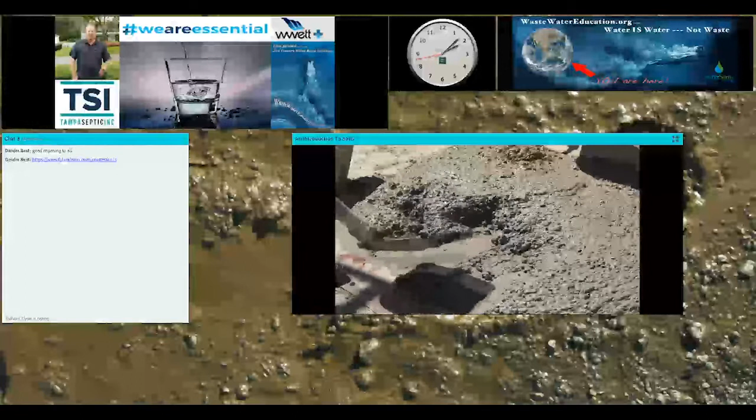Soils are amazing. They're complex and full of life, and yet few of us give soils a second thought. In this course, I'm going to take you on a journey through the world beneath our feet. We'll start with the basics of soil science, what soil is made of and how soils are formed. We'll also look at the variety of soils around the world, why soil is so important, and the life within soils. Finally, we'll look at threats to soil and why we need to protect it. Throughout the course, you'll learn about cutting-edge research in soil science taking place here at Lancaster University.

If you already have an interest in the environment, this course will be perfect for you. You don't need any specialist expertise or knowledge, and it's open to students from anywhere in the world. You'll get the chance to participate actively by joining discussions, taking part in quizzes, and getting your hands dirty with activities related to the soil where you live. By the end of this course, you'll have a basic understanding of soil science and some of the threats to soils. Join us and learn that soil is more interesting than you might think.

We thought this was a really appropriate inaugural class for the WWETT series because this is Earth Month. Environmentalism starts with protecting the very stuff that makes life possible on this planet - our water resources, our clean air, but also the soil, because without that, we won't be able to grow enough food. I think sometimes we hear a lot of misconceptions about wastewater systems, and about on-site wastewater systems in particular.

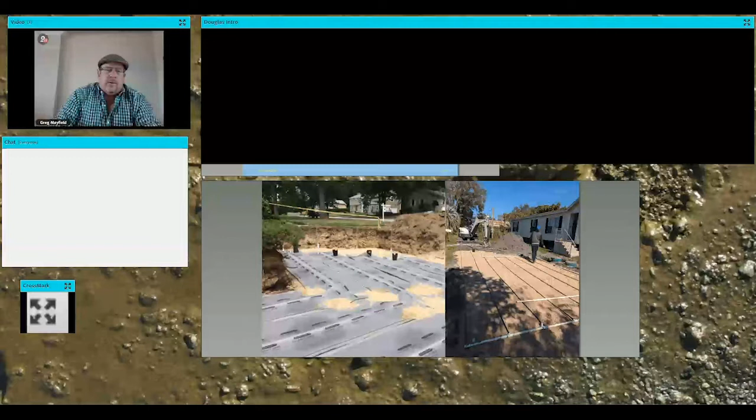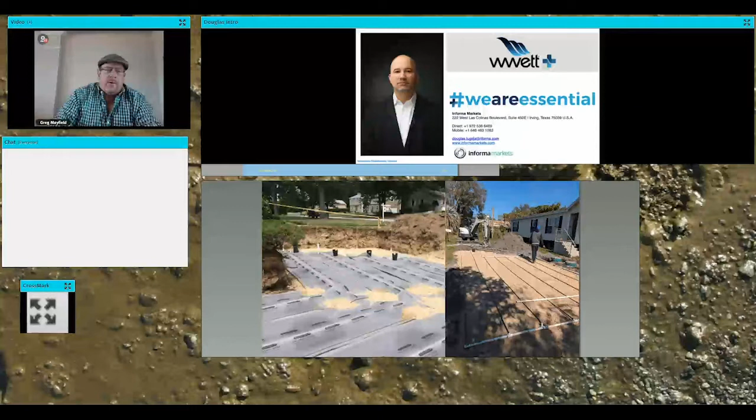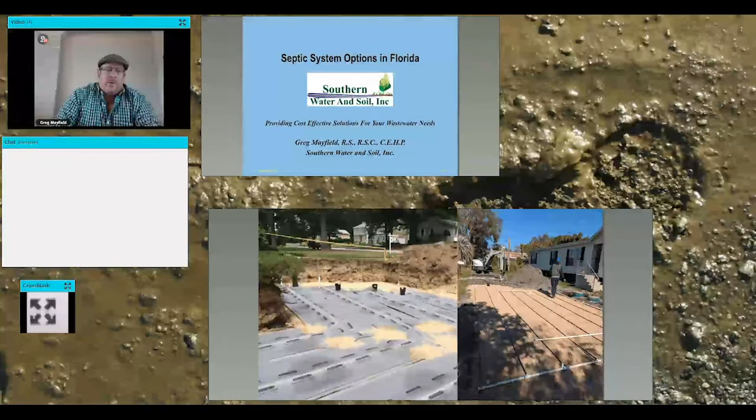One of the things we're going to ask you to consider at the end of this session - if you've attended the WWETT Show, you'll know it's just as much a social gathering as it is for training, for looking at things on the exhibit floor, and for getting together with your colleagues.

The entire city of Indianapolis is closed down. The convention center has not been in business since March 17th, and this has obviously created an incredible economic burden for all the service industry folks who help make the Indy WWETT Show a really enjoyable event. There's a virtual tip jar that's been created where you can contribute if you've been to a particular restaurant.

My background is I worked for the health department for the state of Florida in the 90s, from 97 till about 2001. Then I worked for the Southwest Florida Water Management District as a hydrologist in their program till about 2004 as a project manager. Meanwhile, I was doing soils and engineering for different types of systems with other contractors, about 15 or 16 different contractors here in Central Florida. Over that time, I've learned about different systems and tried to provide solutions for different things that were out there for us.

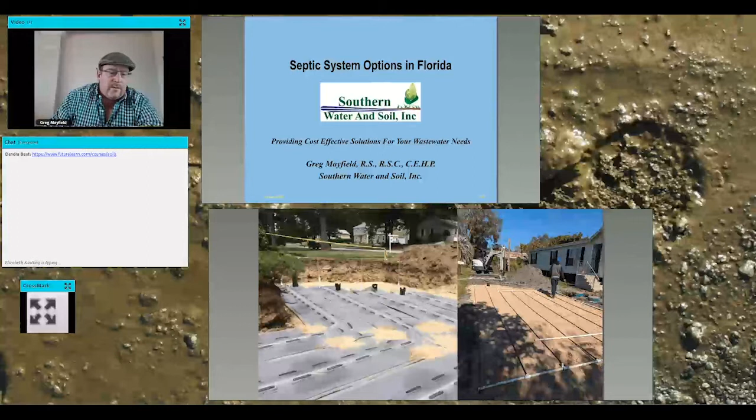The first one I'll talk about - we'll go over some of the pictures that I have.

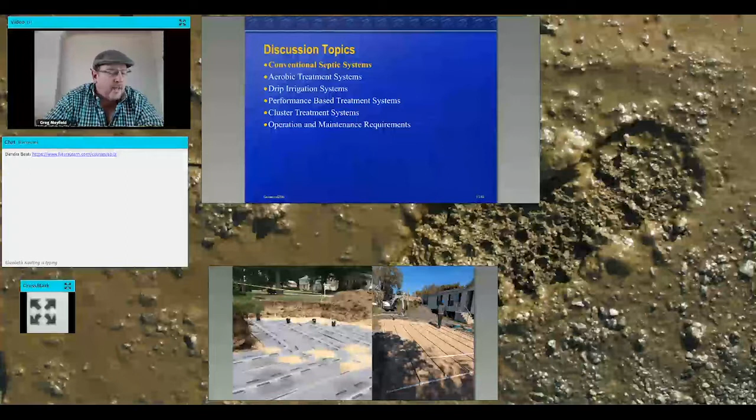Some of the things we're going to talk about are products made by conventional type septic systems that lower the mound compared to a conventional rock and pipe system. The conventional rock and pipe is typically 12 inches thick, 3 feet wide here in Florida, and some of the chambers we have are 20 or 24 inches wide but only 8 inches tall, which trims things up and makes them smaller.

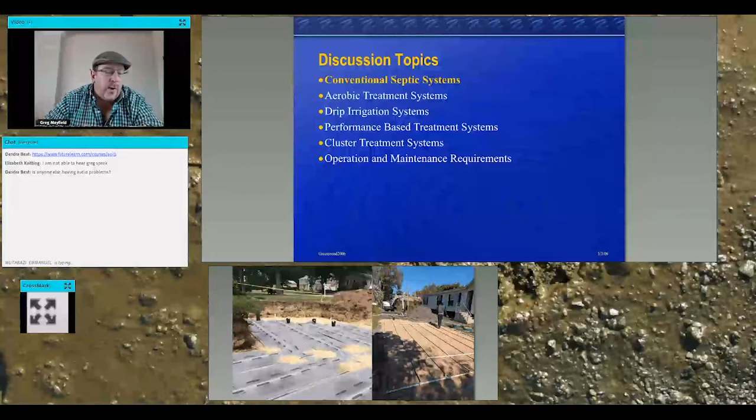Then we're going to go into some aerobic systems, and those aerobic systems allow us to go to a drip irrigation system. So I'm going to talk about drip systems, and then we've got some performance-based treatment systems, which are innovative systems that allow us to treat water to go into alternative type systems. We're going to particularly talk about the GeoMat system, how it fits into the Florida regs, and how it works. So let's go ahead and get started.

But this is still considered a conventional septic system here in Florida. It's probably installed quite a bit more than a rock and pipe system nowadays.

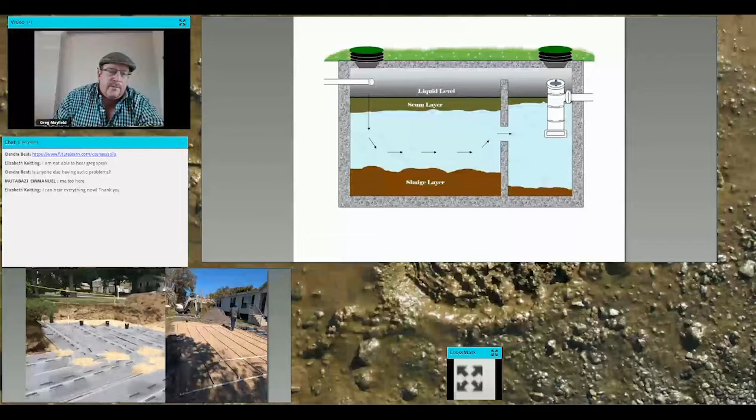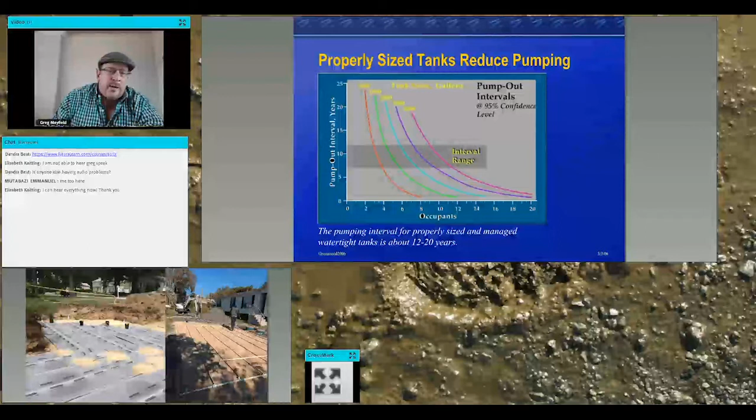A lot of guys ask me when we should have our tanks pumped. This is from Terry Bounds out of Orenco, who shows a pumping interval compared to the number of occupants you have - the more people, the more frequently you need to pump out your tank. So when people ask me when they should pump their tank, I always ask how big is your tank and how many people do you have in it, and that tells you basically when you should. Of course, the rule of thumb in this state is anywhere between 3 to 5 years, and that typically works out for your typical 900 to 1,000 gallon tank.

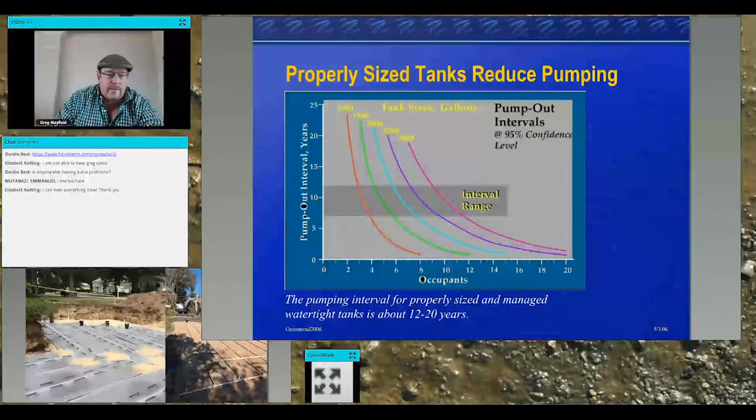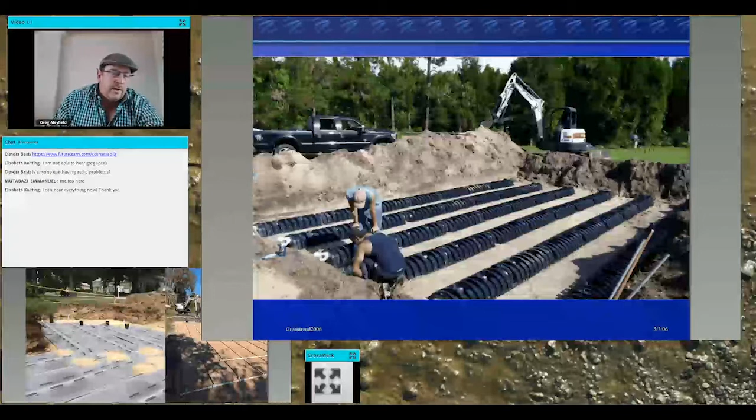This is another install where it would have been probably a 6 or 8 inch mound, and now we're going back in just a little bit below grade there with our infiltrator product. We have a system called PTI, only 20 inches wide. It's a bundle of pipe, 5 on the bottom, 4 on the top on this one, and it actually makes the size of the system smaller. If there was a rock and pipe system, the system would have been as big as that trench is dug out, but we showed how we can reduce the size of the system with this system.

Now we're going to talk about aerobic treatment units, and there's several different types of them out there. This one's what we call a Norweco unit, this is a Norweco Singulair Green. It's what we have to have in order to do drip irrigation, is aerobic treatment. We're going to show some pictures of the biomicrobics unit, and we typically will install one of these two systems here in this state.

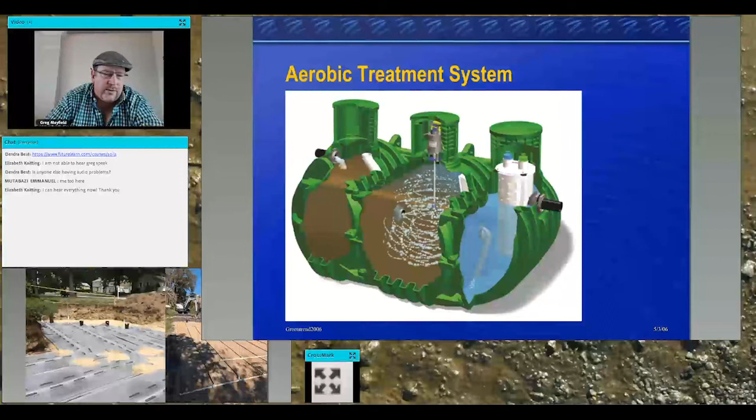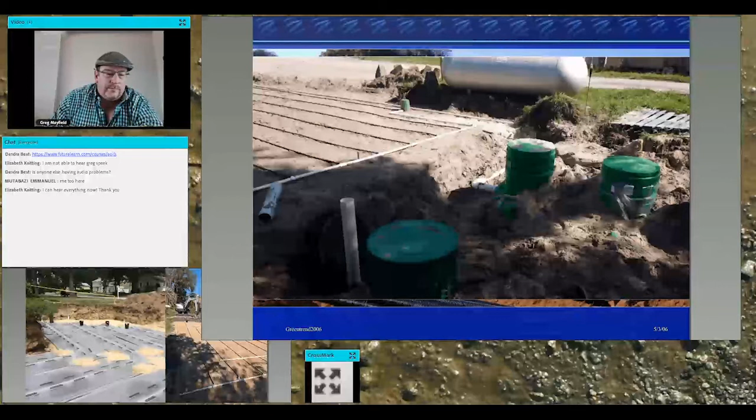Talk about aerobic units also. This one is the extended aeration system. I believe this one is a biomicrobics, or it's a Cajun Air, one of those systems out here. But what that one is doing is treating it, and then we're going into the drip irrigation into the landscape. You can see that we're following the landscape beds with the tanks, and then we put the drip out in the grass, out to the edge.

So here are aerobic treatment units. We have what we call our standard system, then we have a secondary treatment where you get somewhat we call the ATU treatment. And then we have what we call performance-based treatment systems, where we treat to a better standard. A lot of times you'll do that to get more house on a lot, or you have constraints to a water body and those kind of things. It actually reduces the regulation from distance to the water tables, and also to the water bodies.

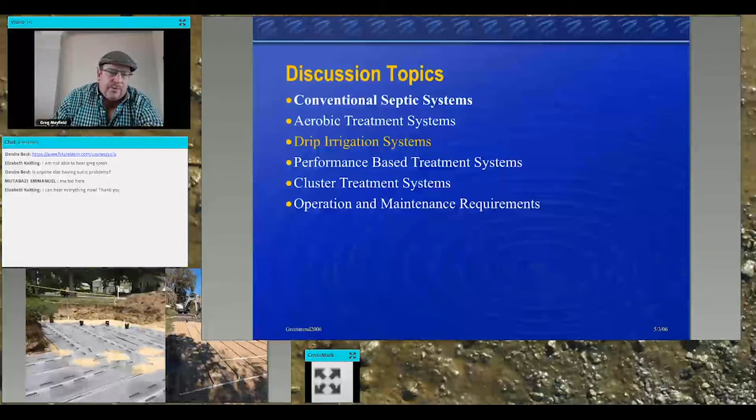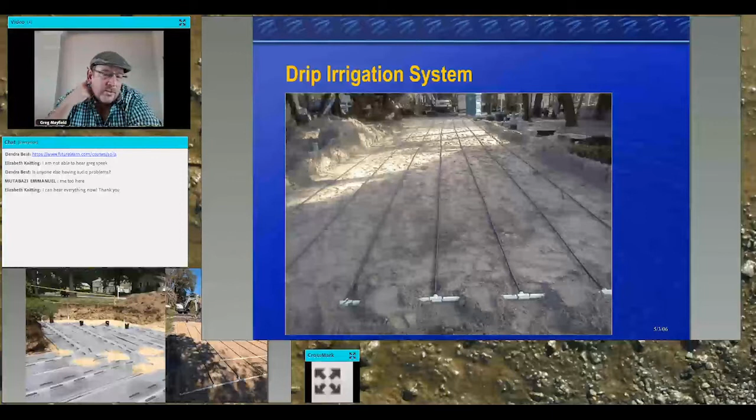Something to say, the EPA has said that decentralized sewers and wastewater systems are adequate, and if they're managed correctly, they're cost effective and a long-term solution for our needs. So some people say, well, septic systems are just not a permanent solution, they're just waiting for sewer to get there. The EPA says no, it's actually a viable solution, and I wish more states would get on board with that and allow the septic systems to do their job, and allow some of these innovative technologies to get in place and allow them to work.

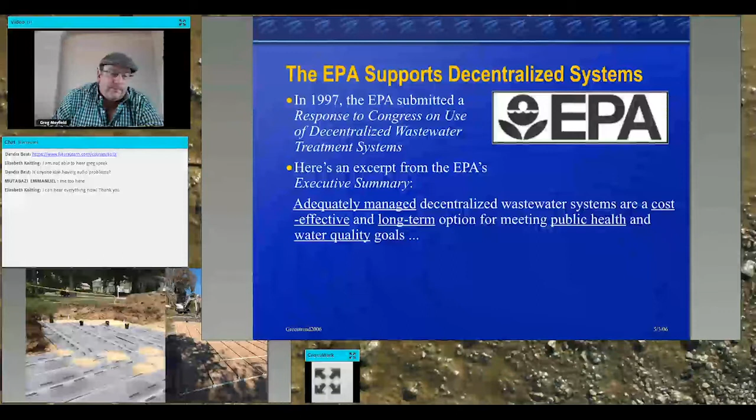This was actually at an Audubon facility where we did a treatment system that went out into a protected water body, an outstanding water body, near a cottage. They wanted extra treatment, so we did a treatment system here and went out into the drip tube. It was along a river, so it was fairly wet. Instead of having a 30-inch mound, we had about an 18-inch mound, which really reduces the footprint by about 50 to 60% when you account for shoulders and slopes. We shrunk the footprint down by about 50% on this one.

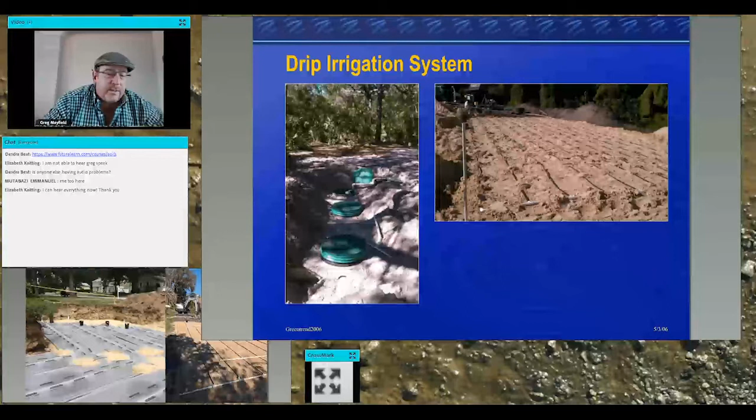When we're going out to the septic systems, they require pumps. Here's a pump set up where we're doing treatment through the system, and then we have a duplex system that's pumping out to the drip tube. I don't remember which project this is, but this is a typical pumping system where we're pumping out to the drip tube.

This one's at a Circle K, which is a fast, convenience store type use. They had replaced their system 3 or 4 times. We went in with several Norwecos on this one and cleaned the water up, then went into a drip irrigation system.

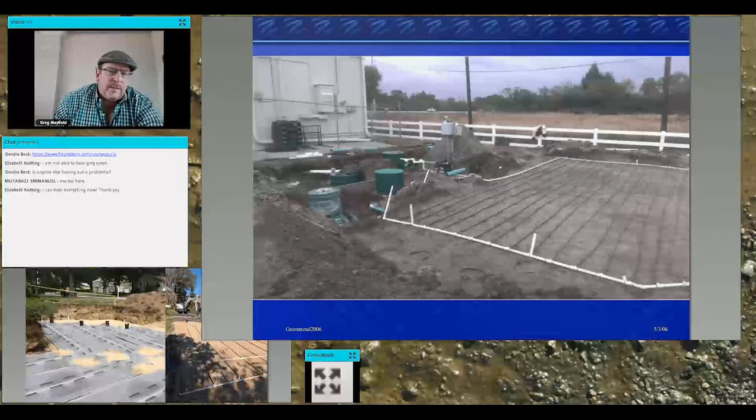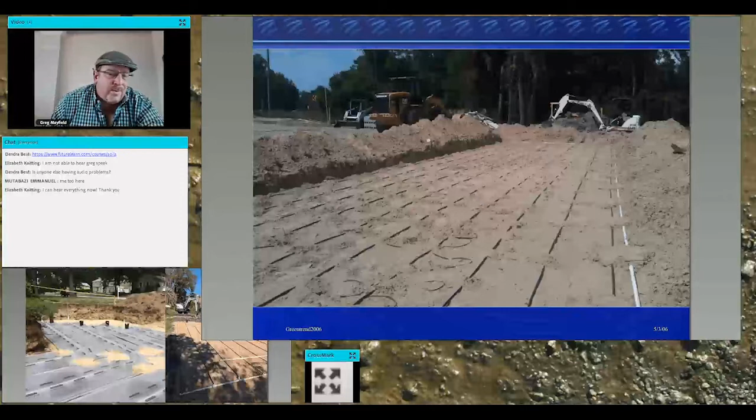This project was a daycare that we did, and we needed setbacks to a water body that was there. They needed 75 feet with a conventional system. We got it knocked down to 50 feet. We had to meet what we call advanced secondary treatment standards, and we used a Biomicrobics unit on this one, and it's doing great. I still maintain this one. It's probably 10 or 12 years old now, maybe a little bit older than that.

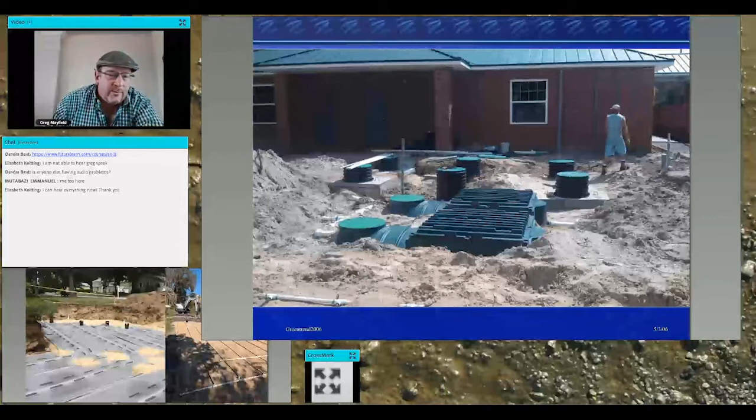This is the setup where we have our treatment going into 2 Fast units. These are 2 MicroFAST 900s where we go into a lift station and pump it out to the drip tube, that drip bed that you just saw. It works well, does a great job, and we reduced the footprint on this one about 50% overall.

On some of the bigger projects and bigger flows, we have filters that Geoflow makes, and we have to go through these headworks. We've done several up in North Carolina where we have these filter housings on their own skids, and we get the treatment going through a treatment plant, then through the Geoflow filters, and then out to our drip tube. We've done subsurface and above-ground drip in North Carolina, just depending on if it's DEQ or I believe it's DNR up there.

The filters have what we call GeoShield. It's a system that helps prevent slime buildup, the bacterial buildup, on those filters.

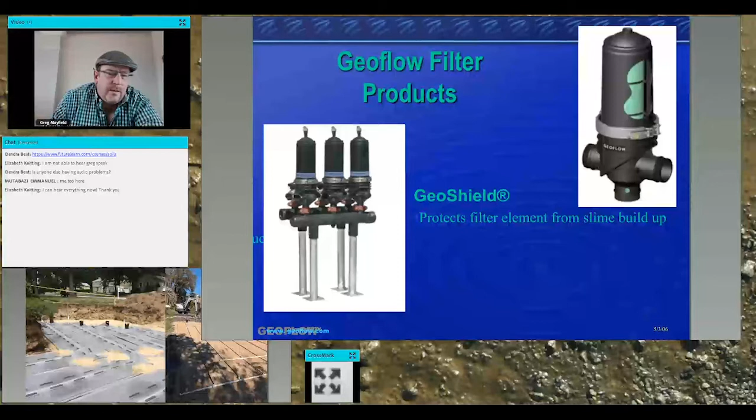Something to think about when you're laying out your system: you've got to look at what your lot lines are, where everything's going to be located, how your tree layout is going to be, and what your contour is. That's why drip irrigation becomes a great solution, because it can get around trees, it can go down contours. If you design it following the contours, it's easy to go around those contours and make it flow. Here in Florida, everything's pretty flat, except where I live in the hills north of town, where we actually have some slope.

It's not uncommon for us to have to use what we call step-down systems, or these drip irrigation systems work out quite well. What a lot of installers here do instead is install quite a bit of sand to level everything out, and it becomes really cost prohibitive, and the systems end up having problems. So try to follow the contours of the installation, and using drip makes it work very well.

In the drip tube itself, it has what we call GeoShield. It's a patented antibacterial technology that basically doesn't allow buildup on the drip tube itself, something similar to Teflon, where it basically allows things to slough off. So when you're flushing the drip out, it doesn't stick on it, it goes ahead and flushes back into your treatment system to be retreated and sent back out again.

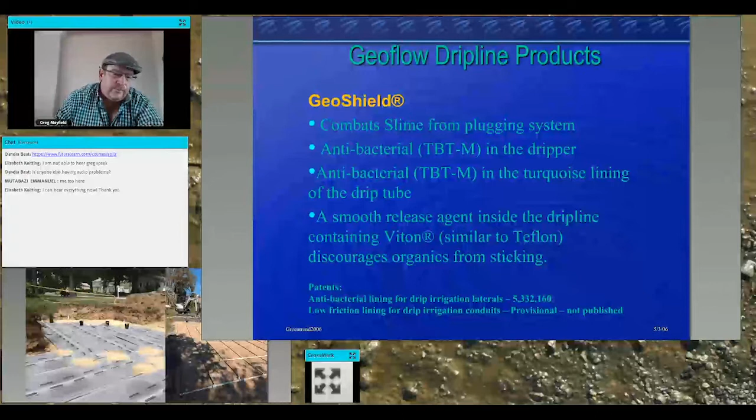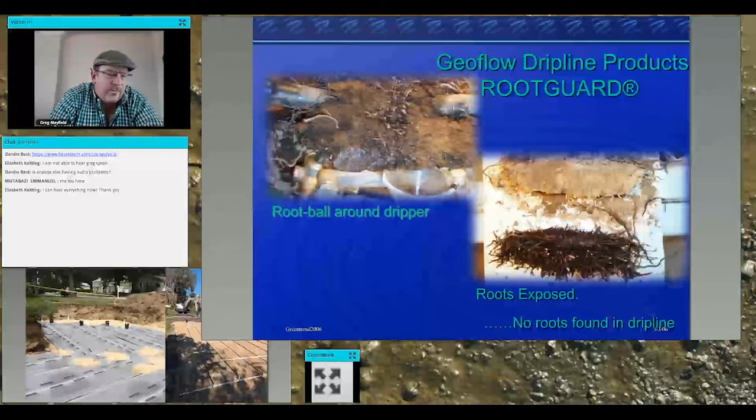There's also what we call root guard. It's a bit of a herbicide that goes inside the drip emitter, and it doesn't allow the roots to grow into the emitter. I've actually seen these in place after 20 years, come back and look at the root ball that's around it, but it's not growing into the emitter. It's pretty neat, actually.

When you're covering up the system, we like to have 6 to 12 inches of soil over top of the drip tube. That way the drip tube can percolate. It goes in a 360-degree web around that drip emitter. It doesn't just go down, it comes up, so it allows some evapotranspiration and some uptake by the grass, which overall reduces the nitrogen going into the groundwater if it's being used in the soil.

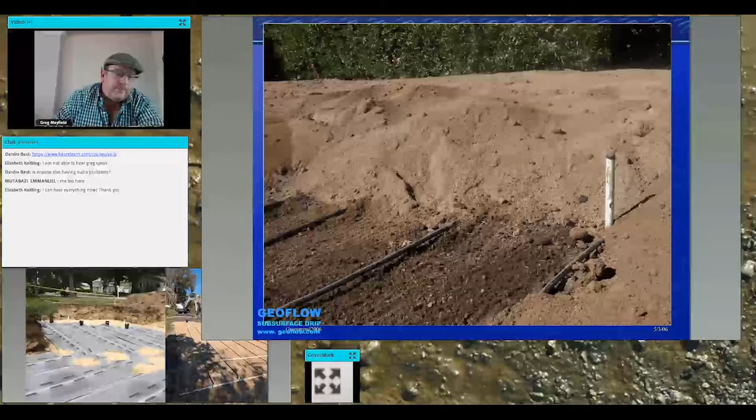So again, we're just going to talk about the system. It has Wasteflow PC, which is pressure compensated, and it has what we call the classic drip tube. The classic requires pressure regulators on the system to maintain pressure, so you don't get too much water at the beginning of the system and not enough at the end. But with Wasteflow PC, if you keep the system anywhere between 10 and 30 psi, or up to 50 psi, you get the same amount of water coming out of each emitter—that's a patented technology they have. Plus you've got the root guard and the GeoShield that keeps the bacterial growth down inside the lines.

I'm going to go through some of these so you can see. Whenever you're offering the Geoflow, it doesn't just go directly from the pump into the drip line. We have filters, we have what we call headworks, there's air release valves, and then we have the time dose controllers that are going out into the drip system.

So it's a design system. They require engineering here in this state, and we design quite a few of them—probably 5 or 6 a month—and it's just something we're used to now. But I tell you, 15, 20 years ago it was totally different. It was a brand new, blazing technology, but it's really become an accepted system that we use now.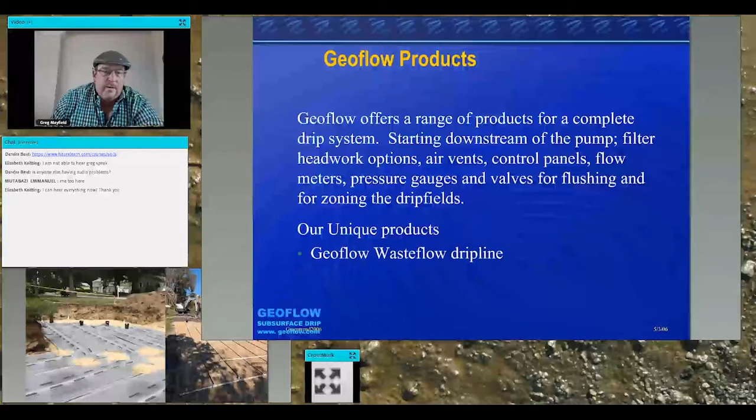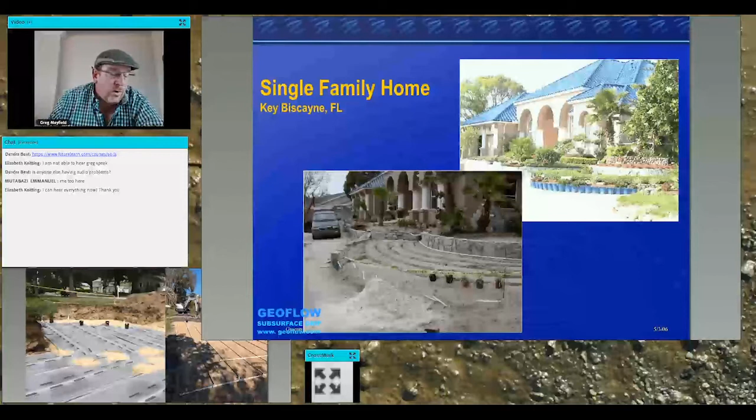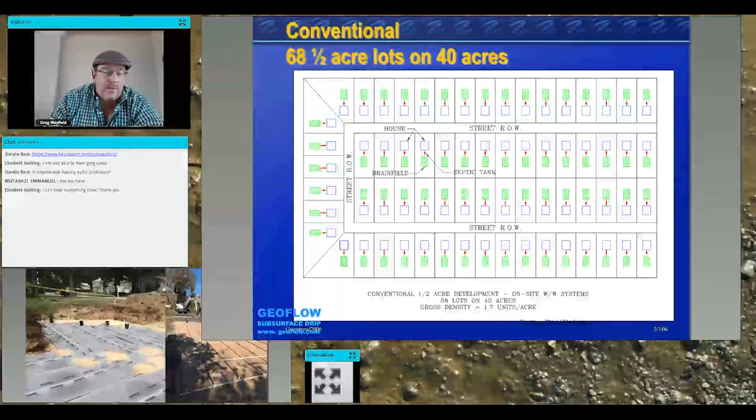So this one I put in for the developers. We have some where, if we do treatment, we can reduce the lot flow allowances going to a system. If you're using conventional septics, you have to design each and every home with a septic system with a tank, and you can do that, but the density of lots is quite a bit less—you get fewer houses with a conventional septic system. Then if you do a treatment system in that same area, you can almost double the size of your system, your houses going in.

What you end up doing is treatment on each lot, and then what we call cluster treatment centers, and then you can go to the drip out into common areas. So something you can think about doing. We do quite a few designs like this—we did one up in North Florida, in the Gainesville area. It's pretty neat. We've done several in North Carolina.

Opportunities for schools: if you do treatment and then go to a drip irrigation system, you can irrigate parks, go to the soccer fields, the football fields. It's great for reuse, and it's great for nitrogen uptake—it keeps the grass green.

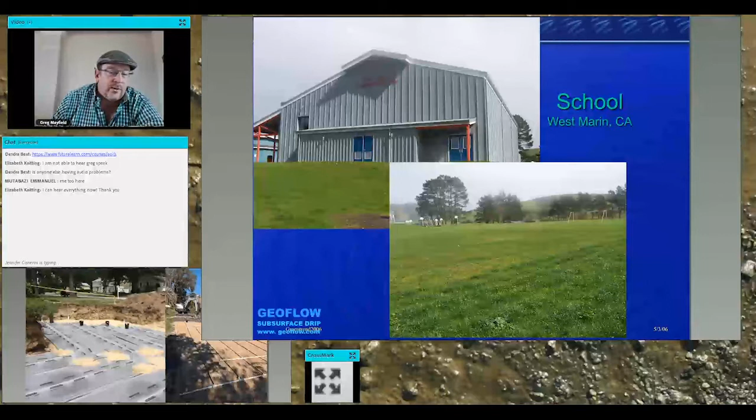So things to think about, why you want to use a treatment system—if you go subsurface. We'll probably move on to these other slides because I just want to talk about some other products too, and I'm getting about halfway through. So let me see, I'm going to move through here.

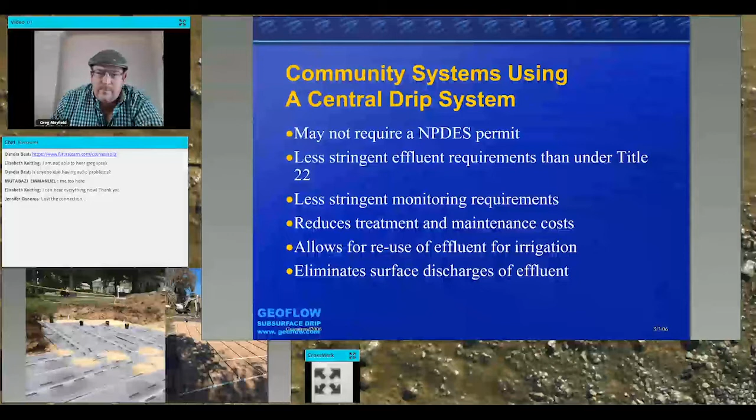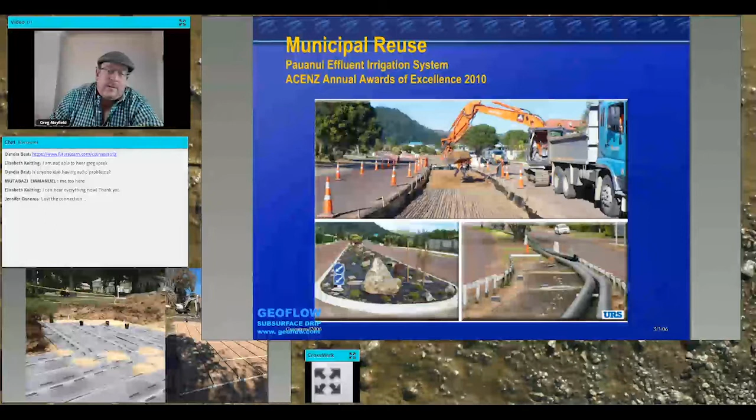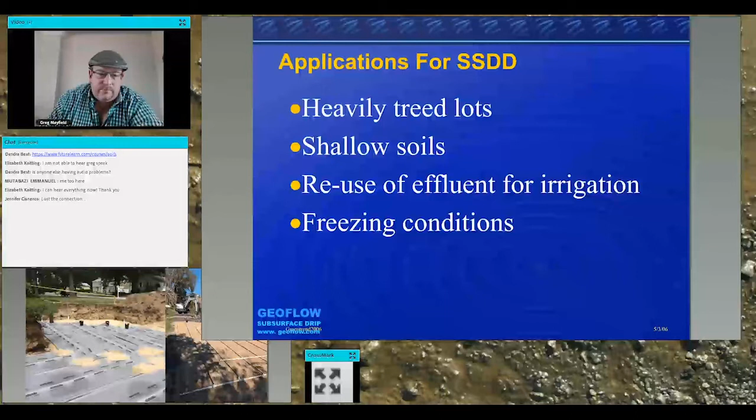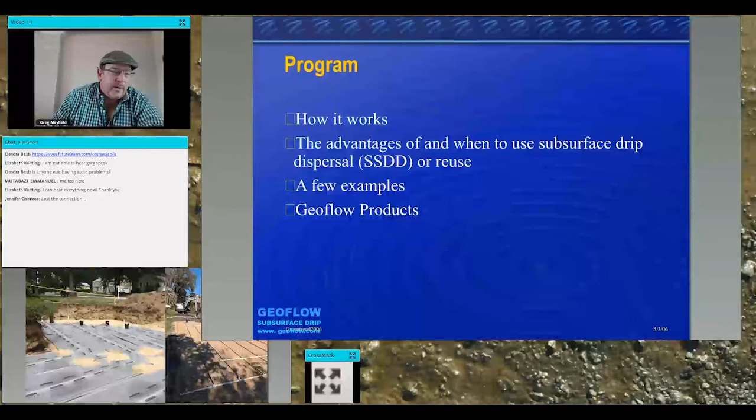So this is talking about the Geoflow and advantages of Geoflow. We have some other products. I'm going to move over to another one of our presentations so you can see some of the GeoMat product that I've been discussing too.

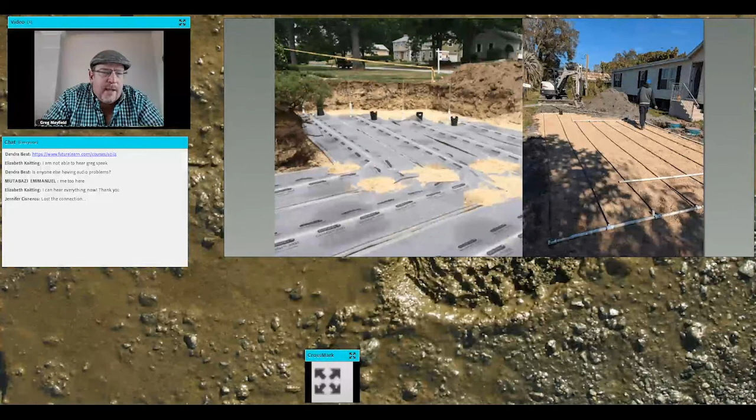So on the left-hand side, what we have here is the GeoMat product. GeoMat is developed by GeoMatrix. They're located up in Connecticut, and they've just been permitted here in Florida under what we call the Innovative System Permitting, the ISP. It's a way of demonstrating these systems to see if they're going to work here in Florida.

They work all up in the Northeast, but here this system is basically a 1-inch mat that's 1 inch thick and 39 inches wide, or you can get it in 12 inches wide. But mainly what we do here is the 3-foot wide product. Then it has a low pressure dosing system that pumps regular septic tank effluent, or you can do treatment, which makes it a better system, but you can actually just do regular septic tank effluent into this GeoMat. Then the low pressure dosing system goes into it all the way to the very end.

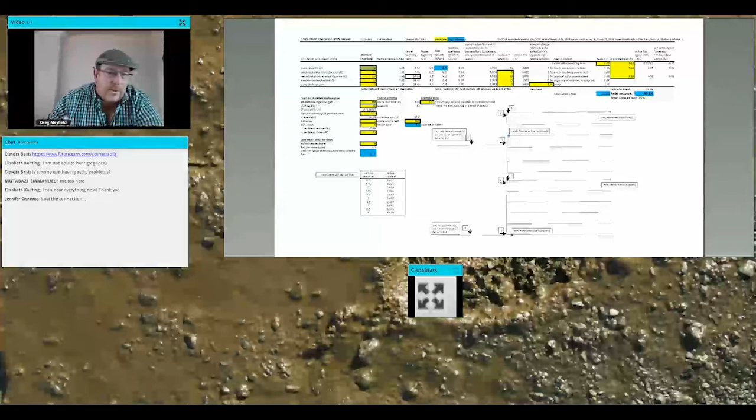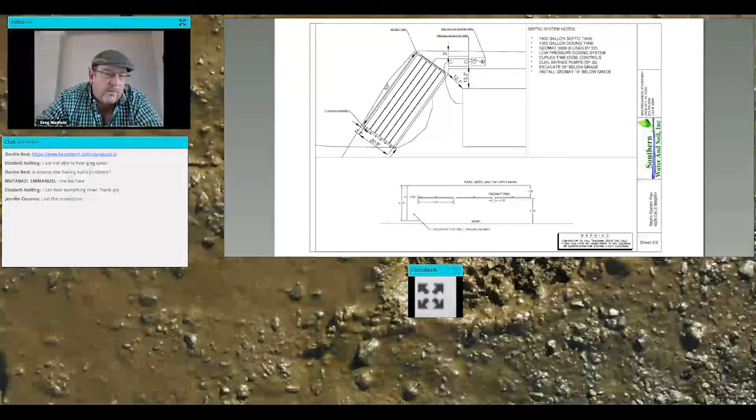And that's the complete site that we have. We have constraints down here at the bottom where we are actually - they have a little pond here, and then we had to get our setbacks from the pond. Very tight lot, very tight situation. But with the reduction in size that we got, and with the low profile, it just makes it a no-brainer.

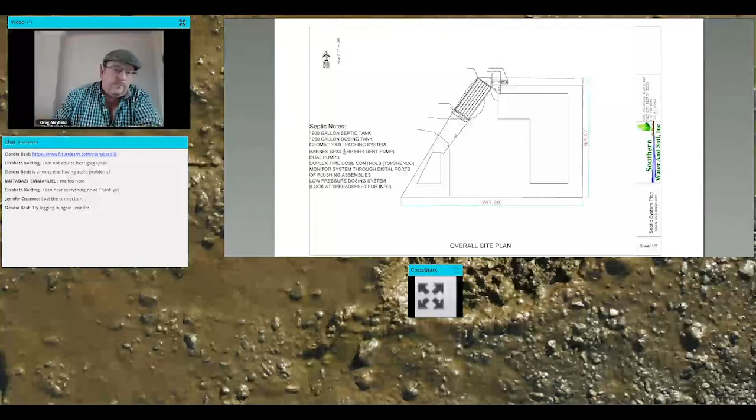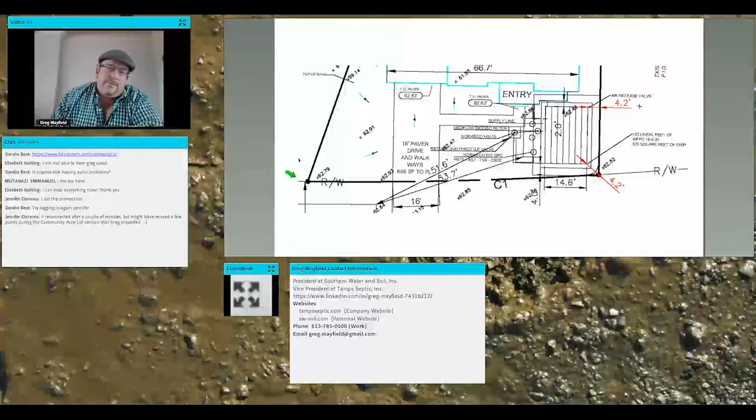Many times what we do is we have systems where people have constraints. This house being built, they wanted to have a pool and a portico, and they wanted to have a bunch of things on site. So what we did is we designed a system to put it in the very back corner to try to hide it. This is a GeoMat system where we designed for the GeoMat, lowered the system down, and put it in the very back corner as far as we could.

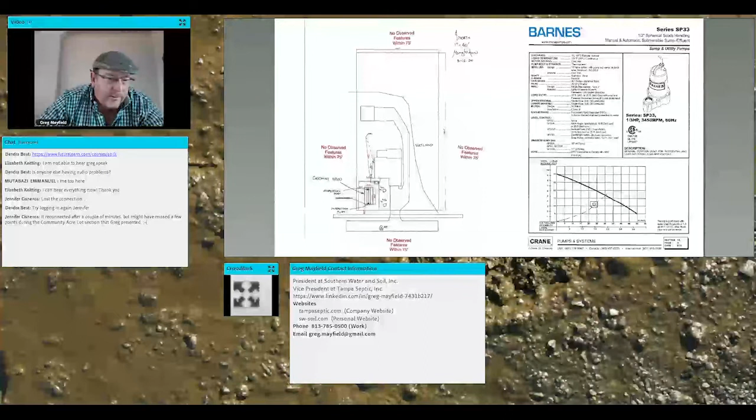If you look at the cross section on this one, you can see that it's 34 inches wide.

Ginger, where's my pointer at? It's in the top. If you hover over the top of your slide, it will come up.

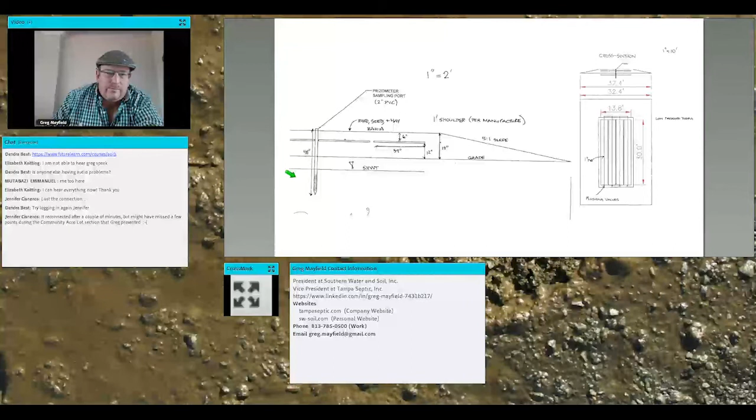So if you look right here, you can see how it's 34 inches wide, and then we have our 1-foot shoulder, and then we have our 5-to-1 slope. It actually reduced this footprint by about 8 to 10 feet in width across this system. If you look at the overall area over here, instead of it being 40 foot wide, it was actually reduced down to 32.4 foot wide. Quite a bit of a reduction in size for the system.

Try to show that as an overall footprint of how it works. It's pretty neat. If you notice down here, we also have to stay away from our seasonal high water table. This one's a newer system, so it has to be 24-inch separation from that seasonal high water table.

We have repair codes here in this state. They require 24 inches for systems built from 1983 and younger, and systems older than 1983 get a 6-inch separation. So if it's a repair and the system is from 86 or 88, the bare minimum is 12 inches if they don't have that 24-inch now. So they could have as little as 12 inches at that point.

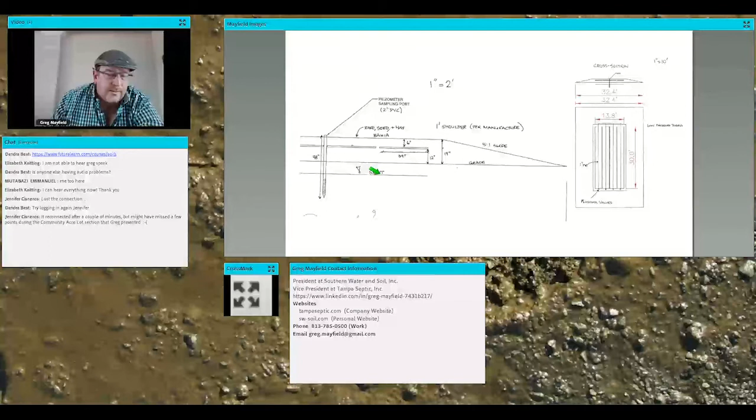This is a system we're actually replacing, one that No Mound did here, but the bladder blew out and it's hard to find parts and guys that service it. So what we're doing is going back in with a GeoMat system. We're designing it with a GeoMat so we can still fit it in that center area of the drive-through, the circular drive.

If you look at this, it's a close-up of that circular drive we have here. Where we have that circular drive, we're putting that system in and fitting it in there. We're having to pull out all the old no-mound system that is in there.

Something else to talk about when we're designing these systems: typically we use a low pressure dosing system that goes throughout the drain field area, and we like to use either the Sim/Tech filters or the BioTube filters by Orenco. They're very nice, and we use a lot of the Orenco controllers that go out. They're just a better widget. We like them, we design quite a few with it, and it works out quite nicely.

Go ahead, Greg. Okay, so this is some pictures that I have from some projects that we have, and I think it's always a good talking point. This system here, we wouldn't have been able to fit this in with a conventional septic system, so we ended up doing treatment. This was a pawn shop, kind of a little strip mall type deal, where we actually, behind here, yeah, let me see here.

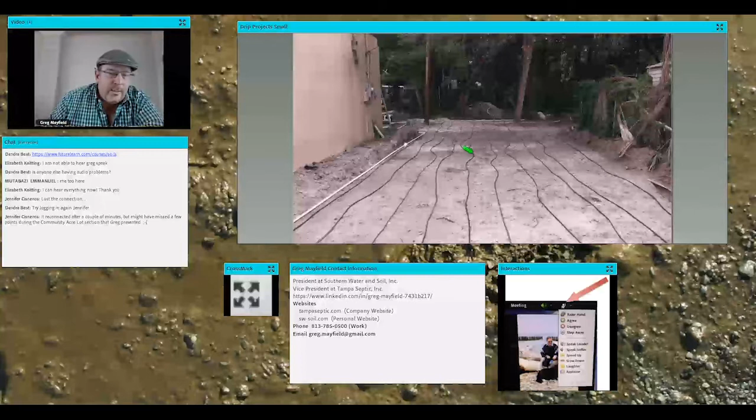Back here we actually have our treatment and our Geoflow headworks, and then the drip all comes out into the area along the side of the building. This would have been probably about an 18-inch mound with a conventional septic system, but we made it to where it was only about 6 inches of fill, reduced the size of it, and made it work. This system's still working today, probably put in around 2010 or 2011. Still going strong.

This one's at a Burger King that we did. This one has probably 20 or 30,000 gallons of tankage. Big grease problem they had in this site. We did 5 or 6 grease traps, a 5,000 gallon per day treatment system.

This one's an Aqua Clear unit, and we had some other aeration out in the parking lot also. Then we went to dual tank and did drip out in the area. We used all of their available area. This system still has problems, and they just use so much grease, and they don't have enough area during their peak flows. So drip and restaurants are not the best suited match.

You have to do a lot of treatment to get it to drip levels. That's where the design comes in. But this was all that would fit in this area. We got it working, but now they have to pump the grease traps out so frequently. It's ridiculous, but it works. If they had sewer, they'd probably connect, but they need to buy another drain field this size to actually make it work. They just don't have the room for it.

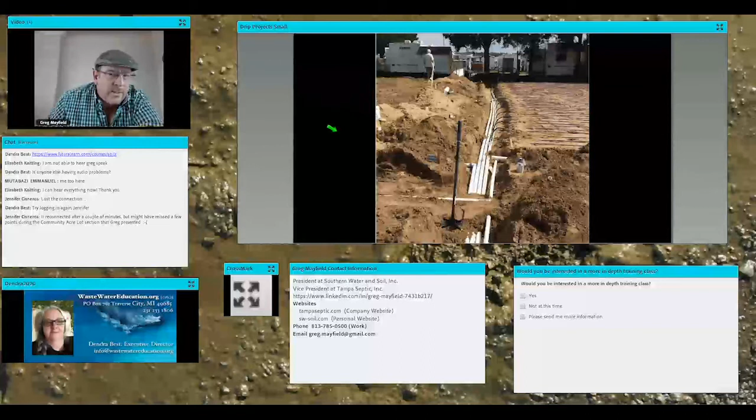Now this is a project that we did in North Carolina. This one we used the Advantex AX Max. That's what was designed - I typically use Geoflow. This one was designed with Netafim, but we installed it according to the engineer's spec, and then we went out from there. This is showing the Netafim.

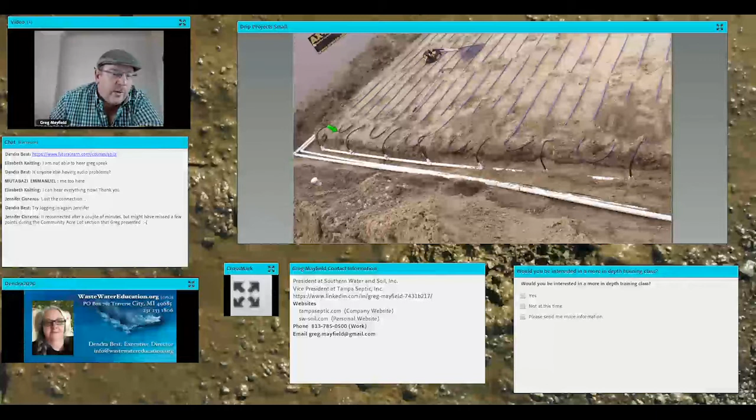In North Carolina, they make you berm your headers, so you actually have to make what we call the dam that goes in between the drip and your headers and your pipes. That way you don't get preferential flow along your headers. And this is it, what we were covering it with. You can see you get about 6 to 12 inches of cover over top of it.

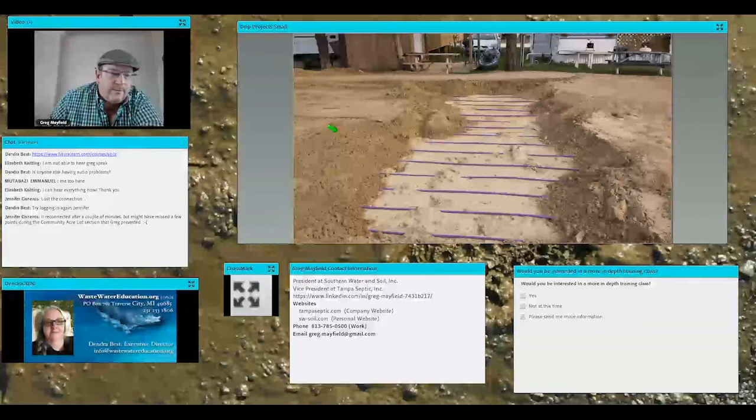This is that same system I showed you earlier, where we had the tight lot - it's a gas station, and all the green area that we had, there wasn't enough room for a conventional system, so we did treatment and went to drip irrigation. That system's still being used today. We still have the maintenance contract on it.

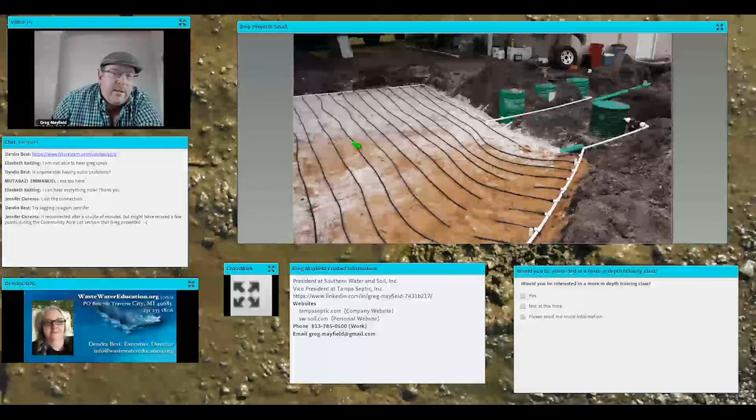This is a tight lot on the Alafia River here in Hillsborough County in Tampa, and they didn't have enough room for their drain field and their driveways, and they had added onto the house and built over the existing system. So we ended up doing a very tight system, and this one's a Norweco Green, going into a drip irrigation system.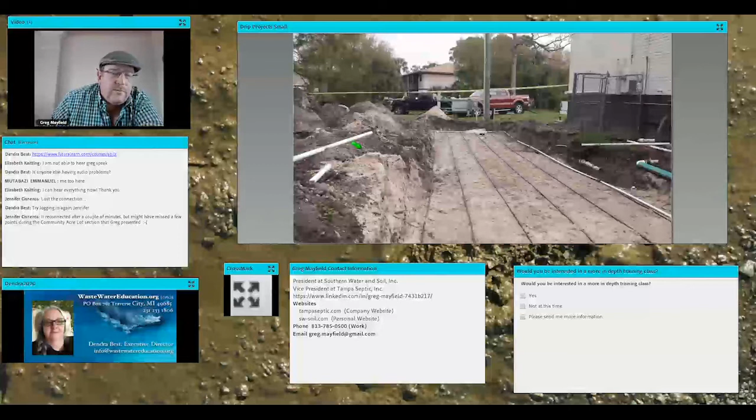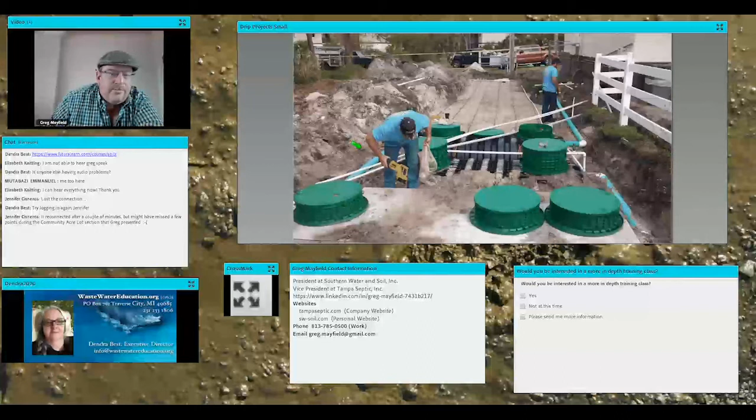This one is an AquaClear unit, and these are infiltrator tanks, and then it doses out into the drip field. And there's another picture, another angle. And then this is it after it's covered.

This is a large house on Lake Magdalene in Tampa. If you notice, the lake is back here, and it's very tight. We did the treatment along the property line. Notice that the property line is about right here, and this would have been a huge mound for a big house, and we lowered it down to a 6-inch fill job versus an 18-inch mound that would have taken up quite a bit more space.

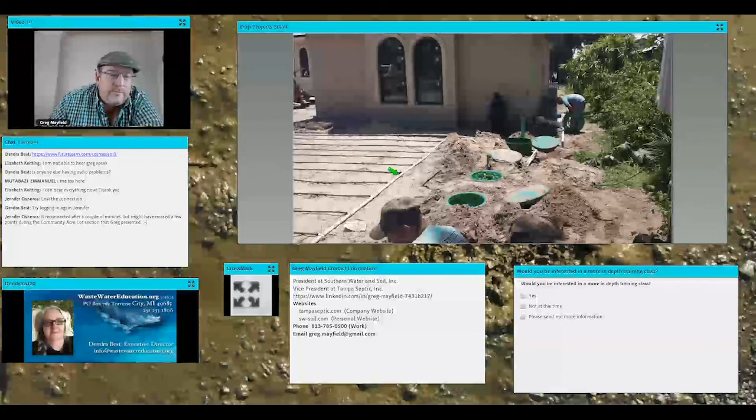And that's the mounded system - that would have been a mounded system, and we lowered it down to just a 6-inch fill. And that's the Singulair Green units. This one, I believe, is another Singulair Green system.

This is another strip mall that we did. This would have been like a 24-inch mound, and we ended up reducing it down to a 12 or 13-inch mound. Pretty neat.

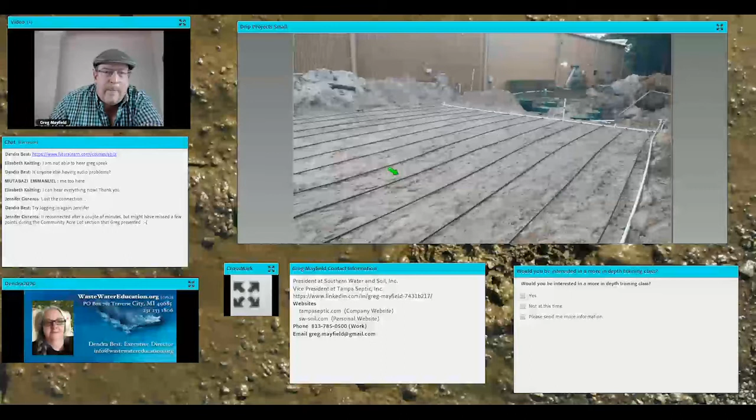That's a pump vault unit. That pump vault unit then allows us to go out to the treatment. This is post treatment. This goes out into the Geoflow from here.

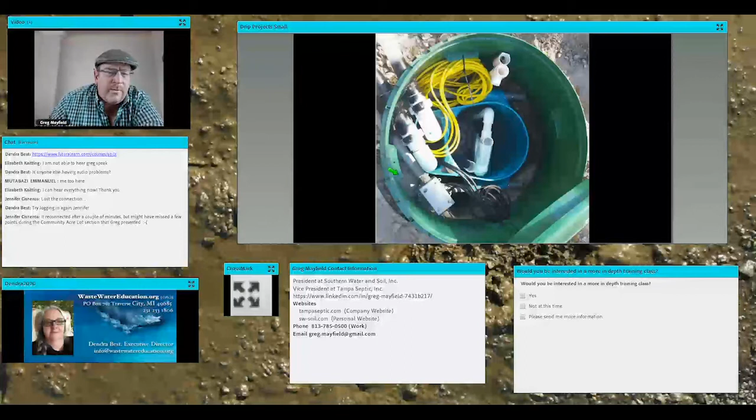This is an aqua clear aerator. And this one has aqua clear aeration going into where it's going to be going into a mounded system here, and we just were doing treatment.

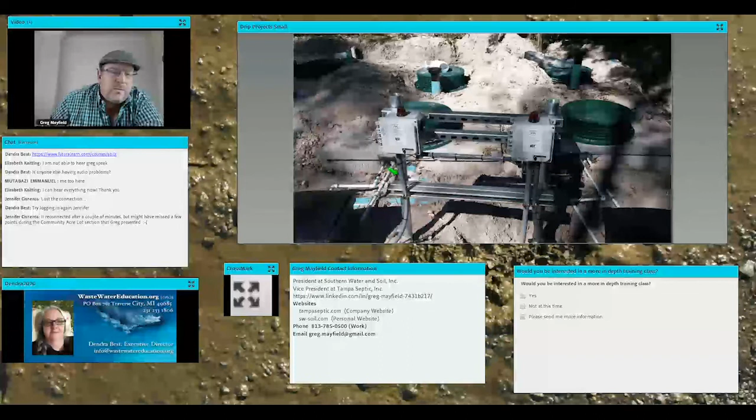These are single air boxes, if you see them here, and this is an aerobic control panel. We use those in conjunction doing our time dose controls that go out to the Geoflow drip tube.

This lady was one of my professors at USF, where I'm actually going back to get my doctorate here in the next year or two. And this is actually a treatment system at their house, and then they're going to a drip irrigation system. That's a Geoflow system. This would have taken out, this is probably 50% smaller than what it would have been if it was a conventional septic system. Quite a bit smaller.

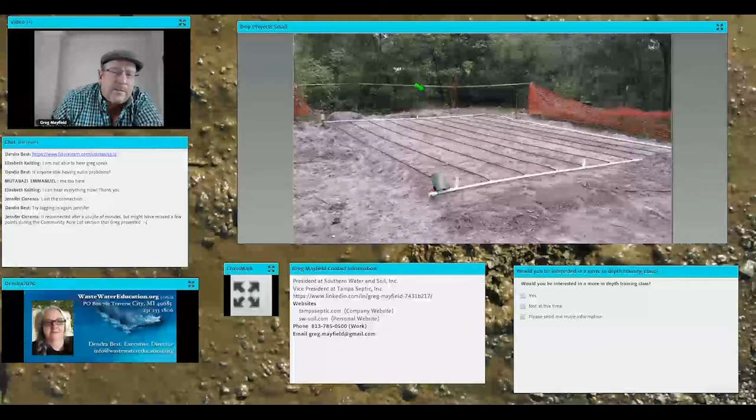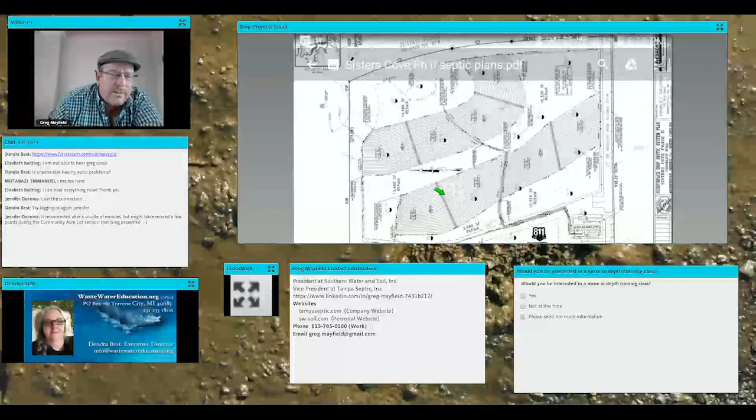We actually did a vibratory plow on this one, and I've got some videos of this one. If anybody wants the videos, we can share that with you. That's actually a ditch witch and a vibratory plow, where we actually plowed that into the ground. It took us quite a while to do that, and that's after the plow here. You can see where we plowed.

That's where we installed the drip inside that area, and that there's an AX Max, we had what we call a surge tank here, the AX Max unit. And then this is a 3,000 gallon dosing tank, and then the headworks actually went right here.

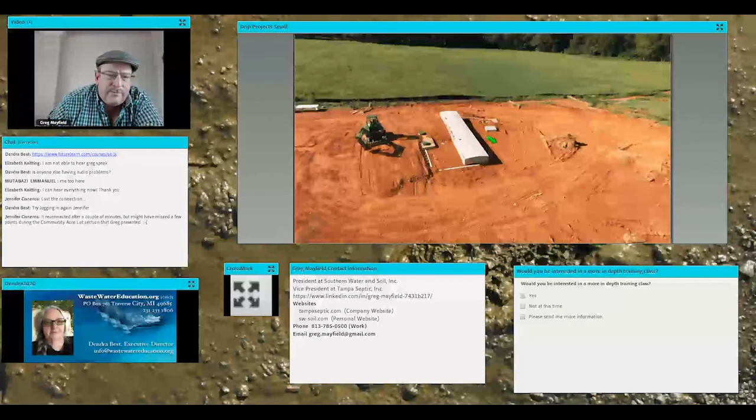That's a Singulair Green unit being installed. This is in North Carolina, where we actually show the dam going up into the drip tube. We have to actually build that earthen dam up before it goes into the drip, and the first emitter is on the other side of this dam. So it comes up and drips into the soil there.

And that's a larger view of that same area that we were plowing. This is the aerial view of the zones that go out, one goes on one way and one goes back the other way. And here's the treatment unit, and that's the lift station, and then we have all of the headworks and zone valves in there for the drip.

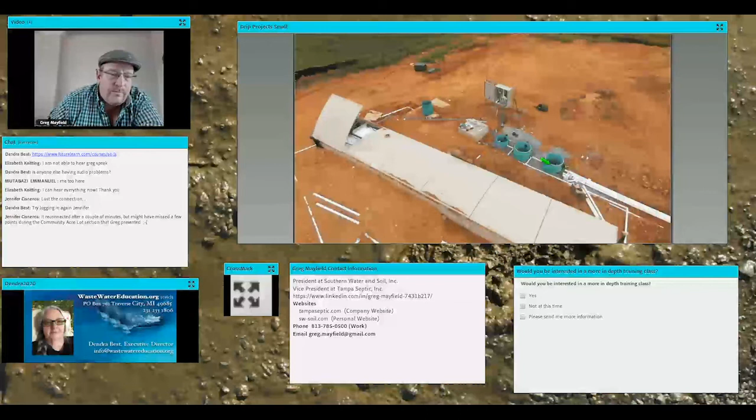This is another tight lot over on Lake Magdalene, where we had to build the site up, and this one was about a 12-inch mound with drip. It would have been a 24-inch mound with a normal system, so we reduced the size down quite a bit.

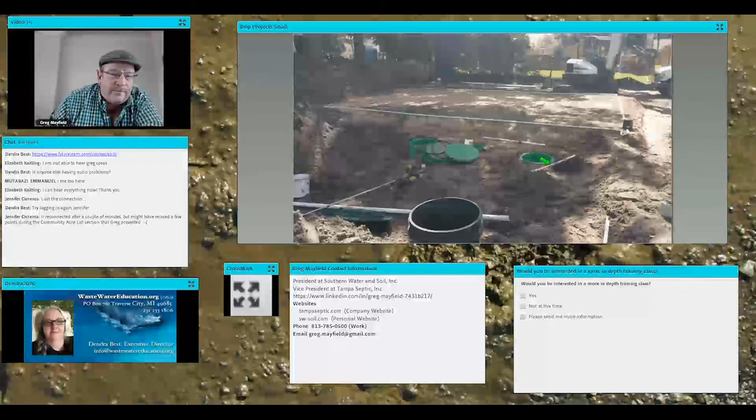Here you can see the tanks and the treatment are over on that side, and then the drip irrigation here. And this is built up, you can see about 12 inches or so. Then we have 6-inch covers, so that's about an 18-inch mound there.

This is for a commercial job that we did, over in North Tampa, Temple Terrace area. And this one has all the treatment units right here. It has what we call the trash tanks up here. That one has dual trash tanks, and it has dual treatment into a large 3,000 gallon tank, which then doses out to the drip field.

This is that same one in North Carolina. You can now see the contours out here, where we've actually taken the bend in it there, and actually we installed more in this area coming down through here.

And I think that just about does it.

Thank you, Greg. It's always amazing to me how people really don't understand that on-site wastewater systems are not a hole in the backyard that all kinds of unmentionable stuff ends up in. I think everyone who's on this call has been in this business long enough to know that there are multiple options for individuals.

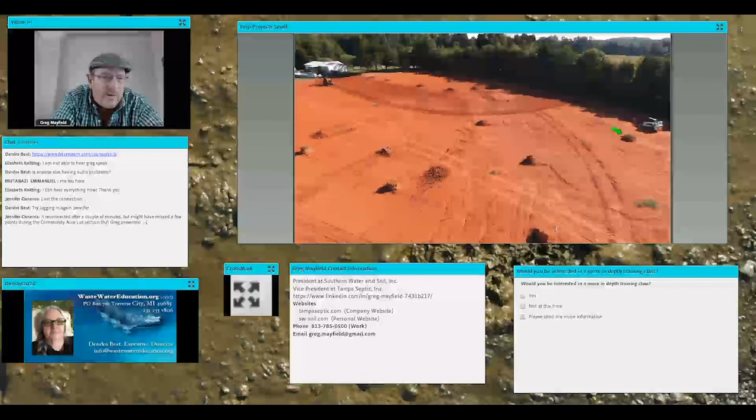We make a better widget, I believe. We make it more maintenance friendly, so I add another pump onto it, I add a duplex control panel. I make it where it's maintenance friendly, and ours is about 18 grand when it's all said and done. With the GeoMat, same size house, same mound, you're around 13 or 14,000. So they're not cheap, but it's more aesthetically pleasing - you can actually build on the lot.

Another question that came in: with so much of the state of Florida and the surrounding states being low-lying, and obviously in the picture there we've got a high degree of clay, what level of treatment are you required to reach in order to have this system?

The level of treatment depends on your site. So let's say we have systems going in on a lake that don't have enough room - you can do a regular aerobic treatment unit if you can fit it in, so that's a 20-20 on your CBOD and TSS. Whereas if you end up with a lot that you can't fit everything in and you've got to get that 50-foot setback, we do what we call an advanced secondary treatment, where we'll end up using the Norwecos, the Bio-Microbics, the Hoots.

On the GeoMat, you typically have the room, you just don't like the mound height, so it will reduce the mound height, and that reduces the cost of having to have sand imported in. But the product's still a little bit more expensive than your typical chambers. And the treatment still is septic tank effluent.